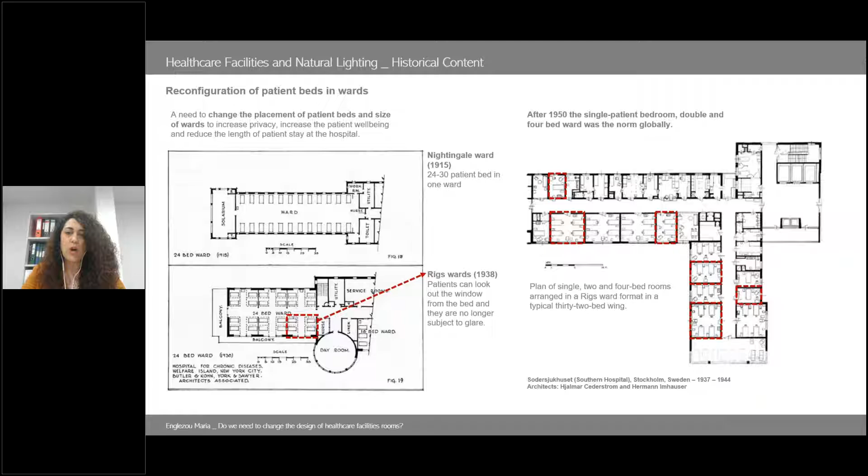While the Nightingale ward was widely used at the beginning of the 20th century, in the later years there was an increased need to change the placement of the patient beds and size of wards to increase privacy, increase the patient well-being, and reduce the length of patient stay at the hospital. Therefore, the Rigs ward was used, which included rooms with 4 beds, 2 beds, or even 1 bed in case of more privacy.

During the last 2 decades, there was an increased interest in the field of lighting, and specifically how daylight can affect the human physiology and psychology. 3 main pillars are identified. The first one includes the physiological aspect of light, which are basically made by photobiologists, chronobiologists, and neuroscientists. The second one studies the psychological aspect of lighting based on behavioral, cognitive, and environmental psychology. And the third pillar focuses on the spatial configuration, including architecture and lighting design.

The existing research investigated the human circadian rhythm and how light relates to changes in hormones, the sleep-wake cycle, the metabolic functions, and more. Other research fields study the cognitive performance of people in educational or office buildings, and basically the effects on productivity, alertness, and attention.

The main scope of the current research is building design and looking at the changes of daylight performance based on the location, orientation, room geometry, aperture sizes, glazing properties, or surface reflectances. To this day, visual comfort included the investigation of illuminance, luminance, or glare.

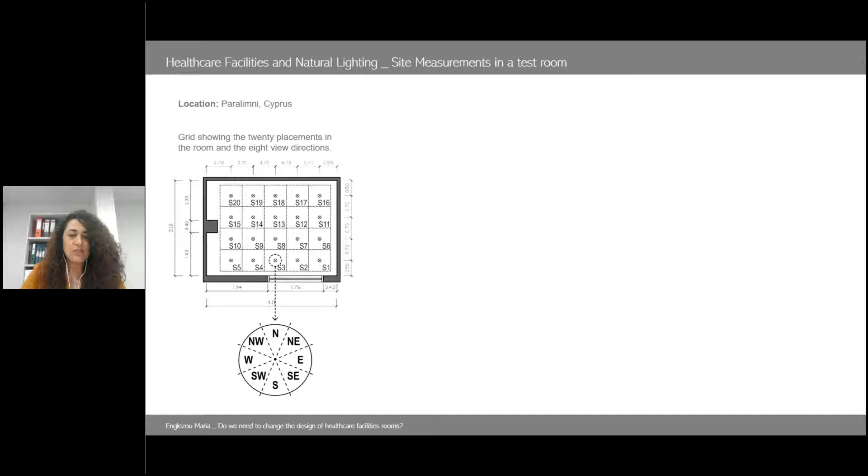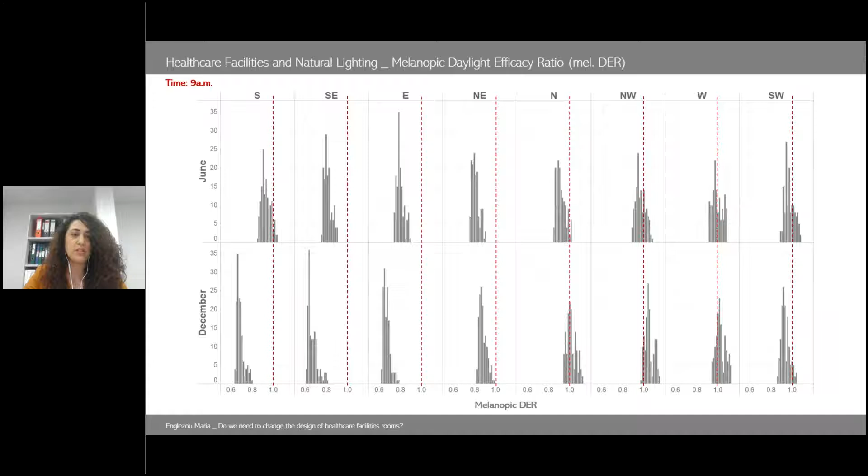In more detail, during June, the south, southeast and east orientations have melanopic DER from 0.8 up to 1.1, while the same orientations during December have melanopic DER from 0.6 up to 0.8.

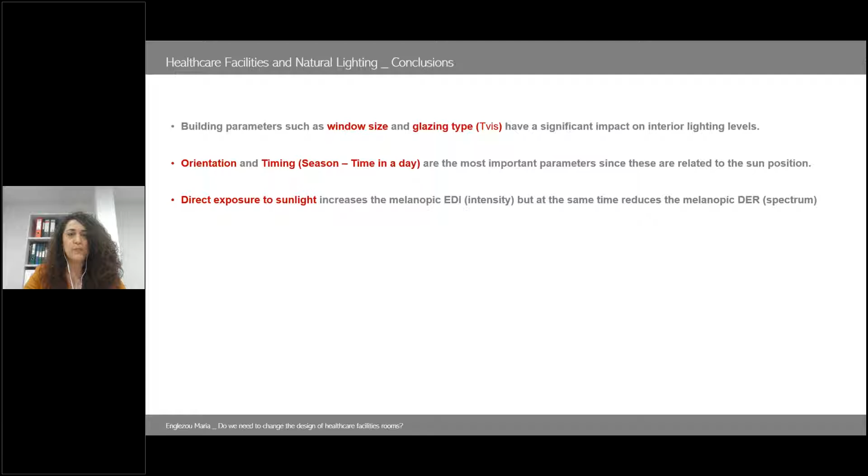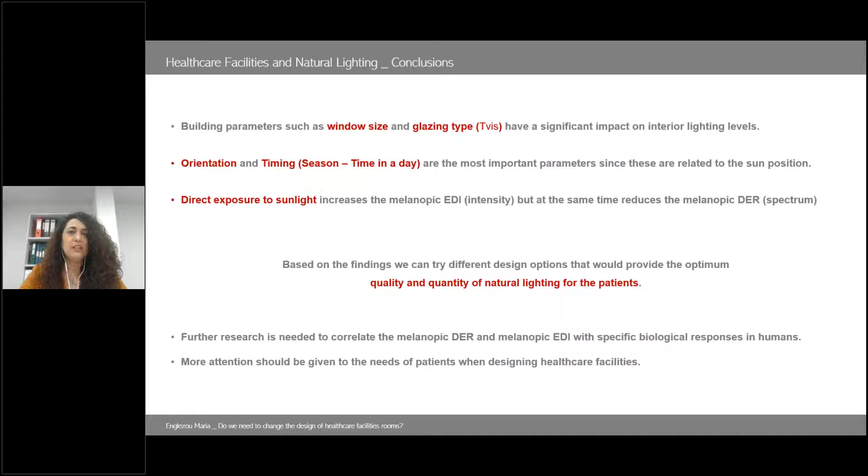So based on the findings, we can try different design options that would provide the optimum quality and quantity of natural lighting for the patients. Sorry. And moreover, further research is needed to correlate the melanopic DER and melanopic EDI with specific biological responses in humans. And finally, more attention should be given to the needs of patients when designing healthcare facilities.

And I would like to finish my presentation with a phrase by Richard Hobday, that in the right hands, sunlight can be a medicine. Thank you for listening.

Thank you very much indeed, Maria. That was fascinating and a great way to end as well. Superb. Thank you so much.

So on to our second presentation of the evening. We have María Teresa Aguilar Carrasco with the title of Lighting Optimization in 24-Hour Work Centers to Promote a Good Circadian Rhythm. Teresa is an architect and researcher at the Department of Architectural Construction at the Higher Technical School of Architecture of Seville. She's a member of the research group TEP130, and they are looking at architecture, heritage and sustainability, including acoustics, lighting, optics and energy. Teresa is a PhD student in architecture, developing research in the field of lighting and its relationship with the architectural design and human health. Over to you, Teresa.

Thank you. Hi. Cancer, depression, obesity, diabetes are only some of the diseases that shift workers may suffer. My name is Teresa, I'm an architect, and I'm trying to help solve this problem. But before getting into the subject, I would like to make a reflection about where we live.

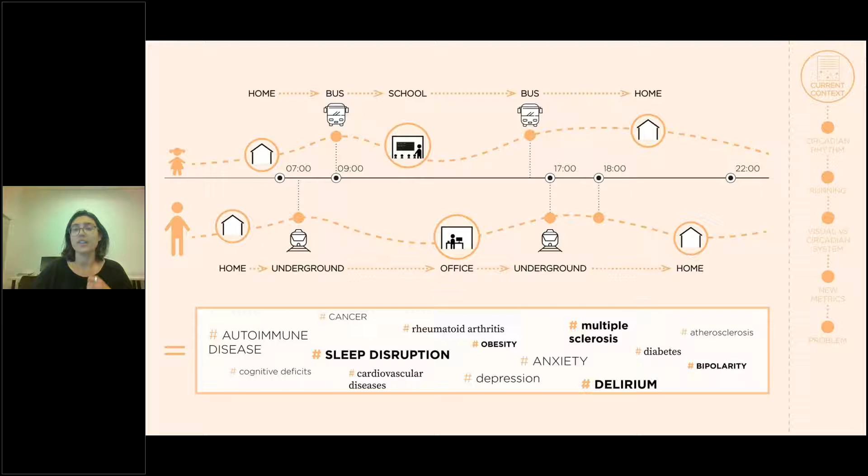So natural light plays a critical role in the circadian rhythm synchronization, but the problem appears when people start spending most of our time indoors, where natural light is insufficient and we have to turn on the electric lighting. So this puts our health at risk due to the circadian rhythm disruption. And several studies have demonstrated that this desynchronization is highly related to a large number of diseases such as sleep disorders, coronary heart disease, cancer, obesity, depression. And this became more and more important in continuous activity work centers where people are exposed to electric lighting not only during the day, but also during the night.

And although the problem appears with the arrival of electric lighting, we need it. So we have to turn it also into the solution. And the solution is called biodynamic lighting. The spectrum and intensity of natural light vary throughout the day and the different seasons of the year. And this is the working principle of biodynamic lighting. Biodynamic lighting allows both the luminous flux and the spectrum to be varied with the idea of being able to replicate the natural light at any time.

And here is where my research question arises. Is it possible to design a system to establish the optimal conditions of natural and electrical lighting in continuous activity workspaces in which it is intended to promote an adequate circadian rhythm? And this is translated into two main objectives. The first one consists of quantifying the influence of the different parameters of the architectural space on the circadian stimulus, that is room dimensions, windows, solar protection, furniture, reflectance. And the second one consists of making a proposal of biodynamic lighting configuration to promote a good circadian rhythm based on the architectural parameters and outdoor conditions, such as sky condition, location, or date.

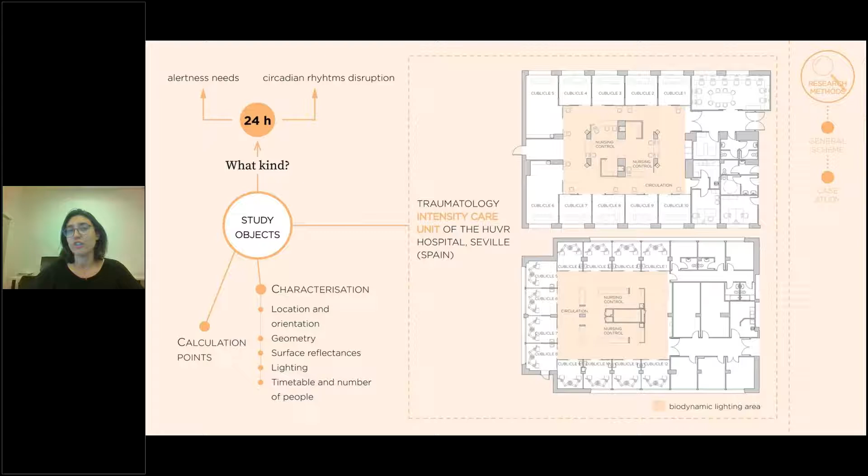And the first step is the characterization of these spaces, since it is essential for the creation of the virtual models. The virtual models are built using Grasshopper. Grasshopper is a parametric tool of Rhino software that has the advantage that it allows modifying any parameter of the architectural space at any time, the room dimensions, the window size, position. And to be sure that this virtual model behaves like reality, it must be adjusted. So real illuminance values are measured and compared with the simulation results under the same conditions. And the model is adjusted until the results coincide.

But this parametric tool, Grasshopper, has another advantage, and I think it's even more important, that is the possibility of using a wide variety of plugins for thermal or energy analysis, structural assessment, and what interested me, lighting simulations.

In this line, there are several plugins such as Diva and Climate Studio by Solemma or Honeybee by Ladybug Tools. And the main objective of using these tools is to calculate the luminance values, since from them and using the mathematical model described before, the circadian stimulus is calculated, as well as other metrics such as the melanopic photopic relation.

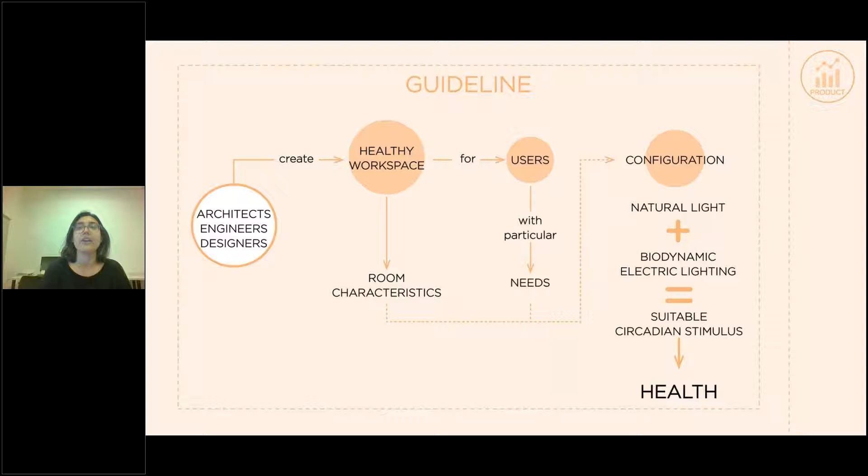And it is intended to be a guideline to help architects, engineers, and designers to optimize natural and electric lighting to create healthy workspaces, especially for users who have particular needs. And the guideline allows to configure natural and electric lighting according to the workspace's room characteristics to promote a good circadian rhythm.

And this methodology has already been proved, and first results have been obtained and published. And this guideline is being created. It has been applied in a 24-hour hospital laboratory, with a room configuration that shows great similarities to typical open plan workspaces. So the guideline can be easily used in many work centers. And the established parameters were the following.

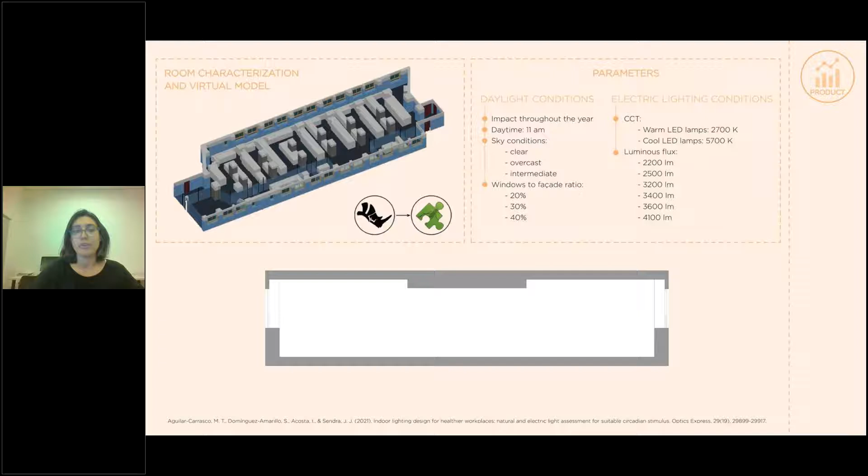About daylight conditions, first, the impact of daylight on circadian rhythms was assessed throughout all the year. And in the case of daytime, it must be highlighted that the objective of this first experiment was providing enough melatonin suppression at 11 a.m., since although melatonin suppression starts early in the morning, the lowest levels are achieved around this time.

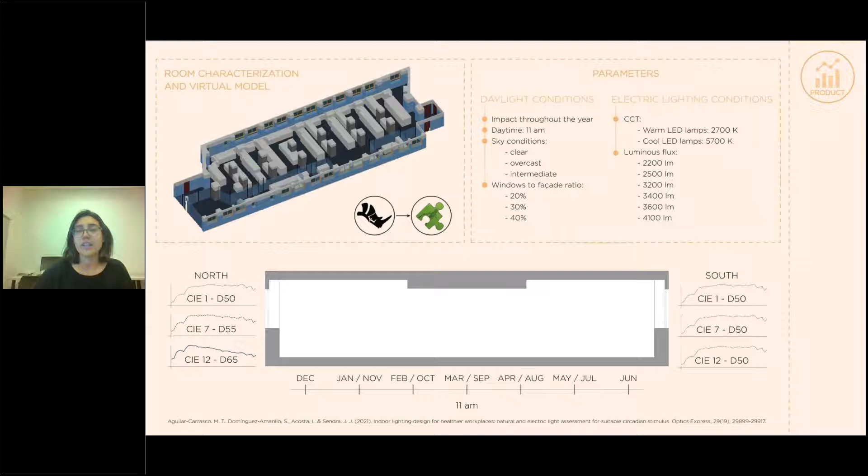As to sky conditions, 3 different skies were selected: clear, overcast, and intermediate skies. And the last parameter that affects natural light, that is window size. So 3 different room models were defined to evaluate the effect of window to facade ratio, 20, 30, and 40%.

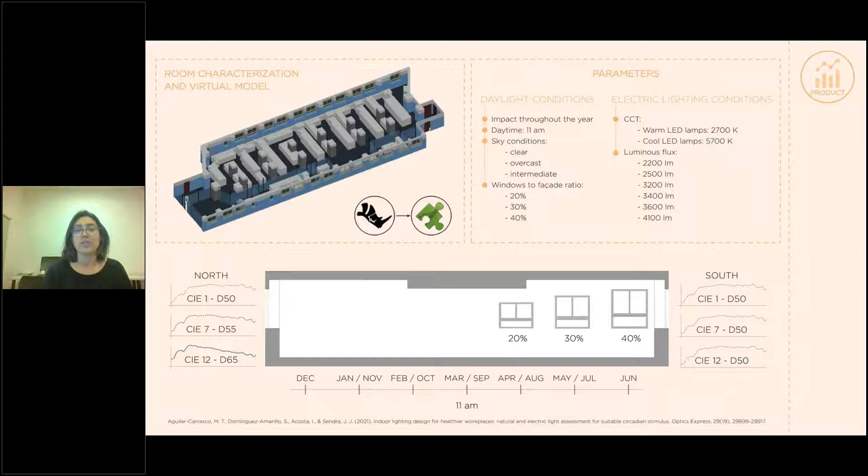As to electric lighting conditions, the correlated color temperature and the luminous flux are the parameters assessed. In this way, 2 scenarios were used, one with warm lamps and another with cool ones.

The virtual model was built and illuminance and circadian stimulus metrics were calculated with every combination of the parameters described before, and the results serve to determine guidelines to quantify the minimum luminous flux required both to guarantee a minimum illuminance value for visual tasks and to provide a suitable circadian stimulus value for occupants.

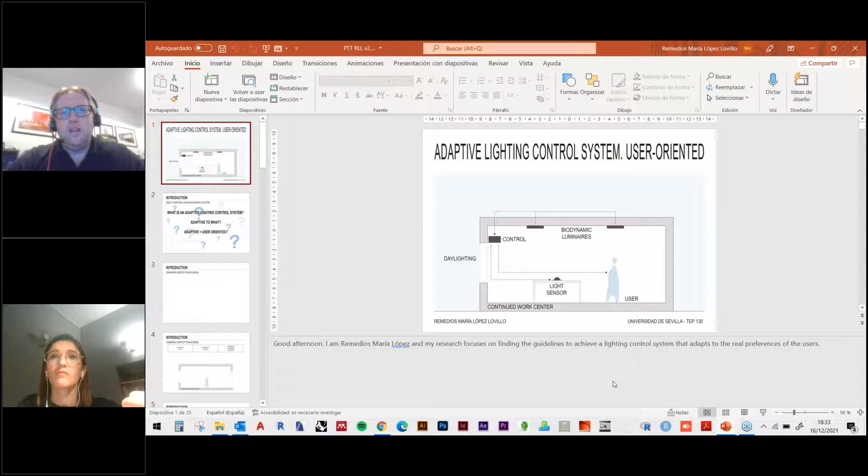This is Remedios María López Lovillo with a talk on adaptive lighting control system, and in particular the user-orientated effects. Remedios is an architect, having studied at the University of Seville in Spain. She is currently a PhD student in architecture and a researcher at the Department of Architectural Construction at the University of Seville. She's also a member of the research group TEP 130, looking at architecture, heritage and sustainability of the Andalusian scientific research. She develops research on the field of lighting control systems and its relationship with the architectural design and human interactions of health. Over to you, Remedios.

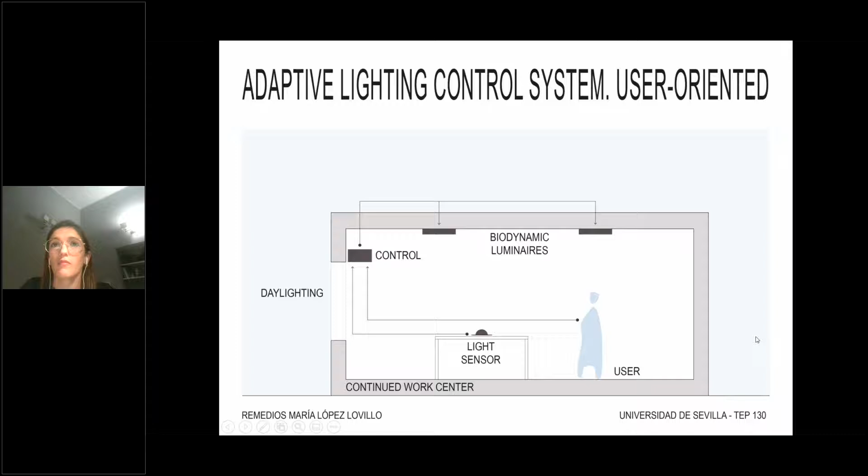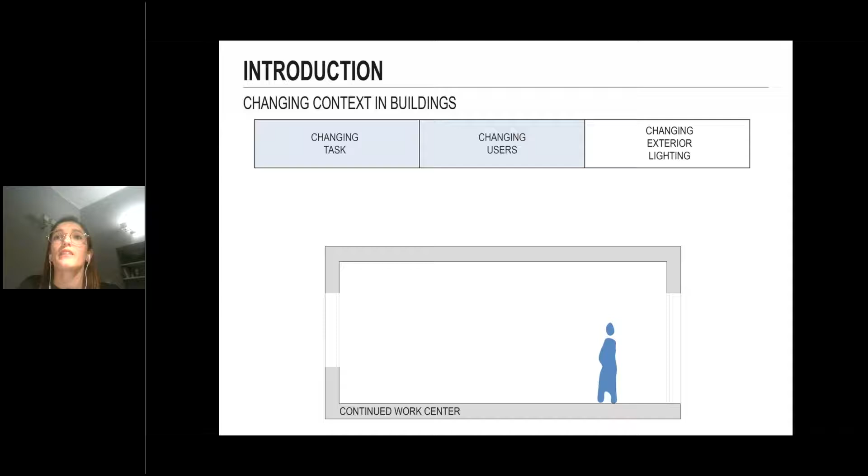I'm Remedios María López, and my research focuses on finding the guideline to achieve a lighting control system that adapts to the real preferences and needs of the users. The first question I asked myself when I started the research was, what is an adaptive lighting control system? Adaptive to what? Is it the same adaptive as user-oriented? The first thing I understood is that a lighting control system has to deal with multiple situations that occur due to the development of different tasks, the occupation by different people, and even the changing exterior conditions.

However, traditional lighting control systems have mainly been concerned with maximizing energy saving, achieving lighting values according to standards, and guaranteeing comfortable indoor thermal conditions. But analyzing the real needs of the user has not been a very widespread objective. So for that purpose, it will be necessary to analyze what are the real user needs, what are the lighting preferences of this user, and even obtain a lighting environment that ensures their health. So these seem to be the keys towards an adaptive lighting control system user-oriented.

So at this point, the following research question comes up. Is it possible to get a lighting control system that considers the preferences of the users, adapts to their needs, and ensures their health? To answer this question, the progress is divided into two sub-questions. The first one, how can we configure a user-oriented lighting control system? And the second one, how are the user preferences, needs, behaviors being incorporated in this control? So the aim of this work is to establish the guideline to achieve a lighting control system user-oriented.

So the first approach to achieve this objective is to analyze what are the conditioning elements of this system. First, it is important to consider what are the lights inside the space we analyze. We must be aware of the importance of prioritizing the use of daylighting because it is beneficial for the health and the performance of the users. However, we cannot always depend on daylighting. So the most common system combines the use of both daylighting and electrical lighting.

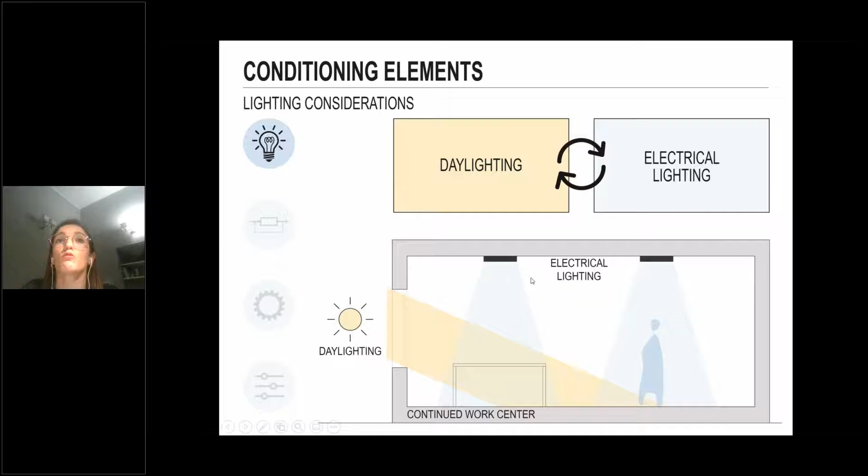So considering the two lighting sources mentioned above, the next step is to determine the type of strategy. Traditionally, two main types of strategy have been established: feed-forward or open loop, and feedback or closed loop. In the former, only daylighting is considered, while in the latter, the feedback component allows analyzing the level of both electrical and natural lighting and regulating the system according to the established values.

In this system, multiple elements participate. For example, sensors are very important elements because they give us information about the lighting level in several points of the space, but they also give information about presence, or can even identify the occupants. Actuators are related to the output element of the system, and these not only turn the luminaires on/off, but also allow regulating the brightness or the intensity, and even the color temperature. Controllers are an essential element too, because they define the control mode. For example, it could be on/off, proportional to the measured level, or proportional to the measured error.

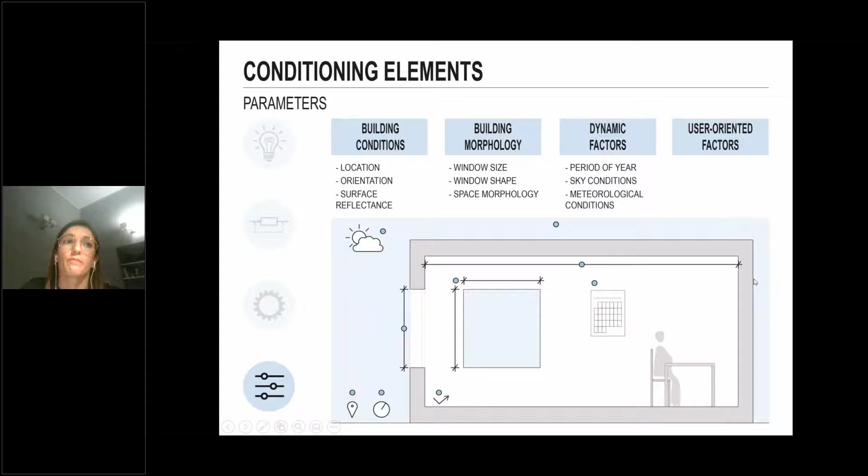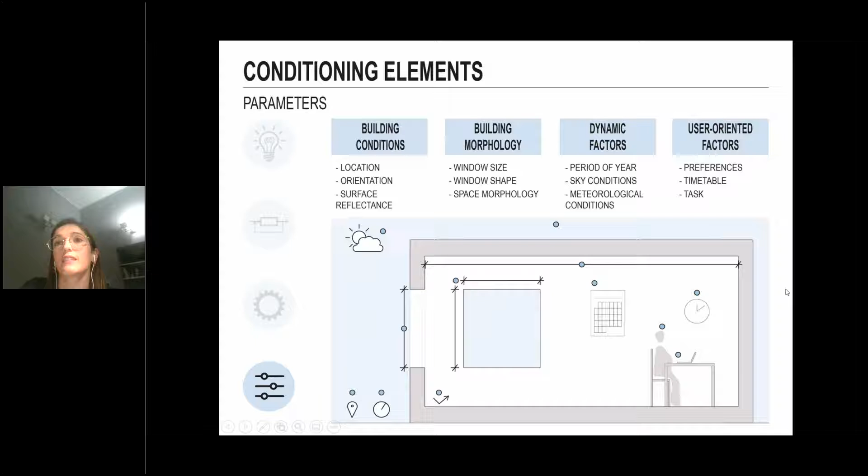Another important consideration is to know what are the parameters that define the space, the surroundings, and even the user. For example, we have building condition parameters, such as the location, the orientation, or interior ones like the reflectance of the surfaces. Others are directly related to the morphology of the space, such as the window shape and size, and even the dimensions of the space. There are dynamic factors too, such as the period of the year, the sky condition, or the meteorological condition. And in relation to the user, we must consider their lighting preferences, their timetable in this space, and even the type of task they perform.

So we already have the key elements to configure a lighting control system. But how can we include the user in this system? Well, first we must know what conditions the user in relation to their preferences and needs. Visual preferences must be considered, but also thermal, because they could condition the former.

Moreover, physiological aspects such as the regulation of the circadian rhythm and psychological aspects must be considered. And to know how these factors affect the user and their behavior, we can analyze their interaction with the system, for example, through observation. However, this is not always possible and/or effective.

So another method is through surveys. In this type, we can use much more structured and direct questions to know more specific aspects. Otherwise, some research has found that people have more important things to do than worrying about configuring the system to their preferences. So it could be better to anticipate the actions of the occupant.

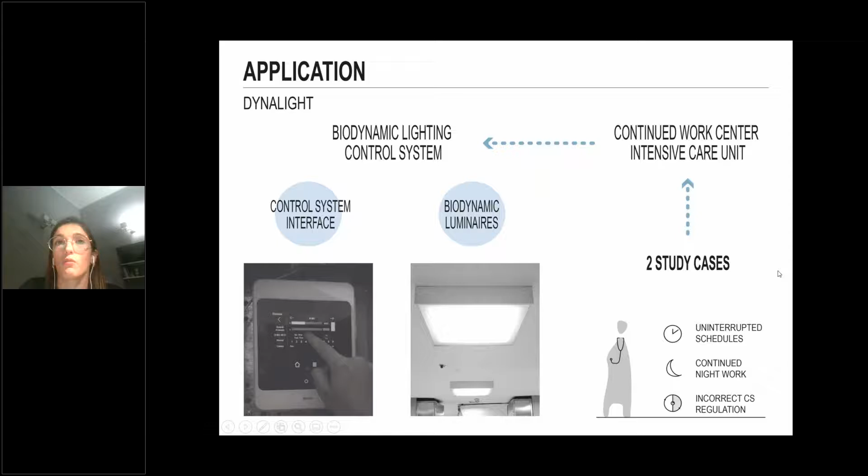So in the first project, called Dynalight, a biodynamic lighting control system has been installed with biodynamic luminaires, controlled by a SPENA module. So in this unit, the system allows regulating both flux and color temperature to favor the circadian rhythm of the occupant. So in this project, we have configured different scenes and we started the experimentation.

On the one hand, we surveyed the users, asking questions related to color rendering, thermal comfort conditions, and other parameters. And this is complemented with biological samples that have been collected to control the melatonin secretion and thus know the regulation of the circadian rhythm. And also on these test days, environmental measurements have been taken related to the horizontal illuminance, the vertical illuminance in 4 directions, and humidity and temperature.

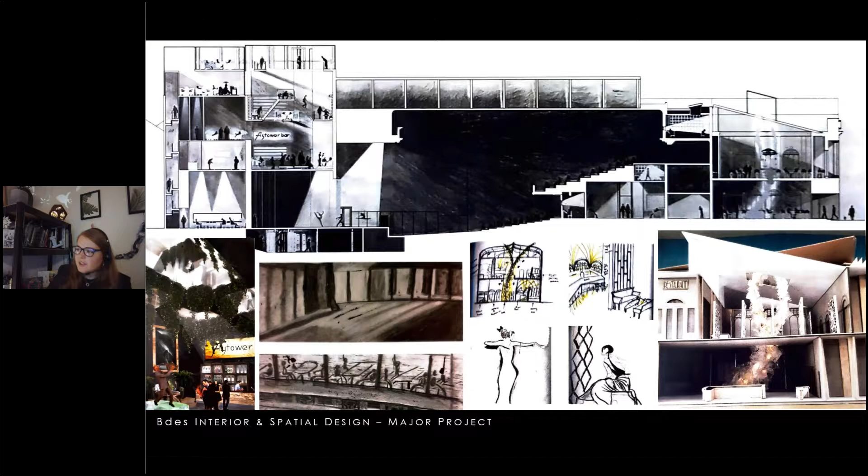My interior and spatial design major project looked at the restoration of an old Art Deco theatre. During the project, I became very interested in designing an artistic lighting centerpiece at the entrance of the building to draw people in with the light. At the end of my undergraduate degree, I continued my education with a lighting design master's at Edinburgh Napier University.

My first introduction to co-design projects was during my master's degree. My design tutors Malcolm and Ewan were working on the 12 Closes project in Edinburgh, and I was able to assist. The project aimed to reimagine Edinburgh's Old Town and worked with the residents of the closes. Exploration started with allowing the residents to play with torches and other luminaires to explore and propose new ideas and ways of lighting the closes in a fun and functional way.

At the start of my master's degree, I began looking into projects that involved co-design with children. There are many examples of co-design with children and even with adults within other design specialisms. However, at the time of the project, I could not find any documented projects about co-design with children within a lighting project.

My lighting design major project: Children's Utopian Visions of the City, co-designing lighting master plans through play and exploration. The project established processes and methods involved in children's co-design. It was based on a case study working with children to redesign urban third spaces in the west of Edinburgh under the topic of utopia.

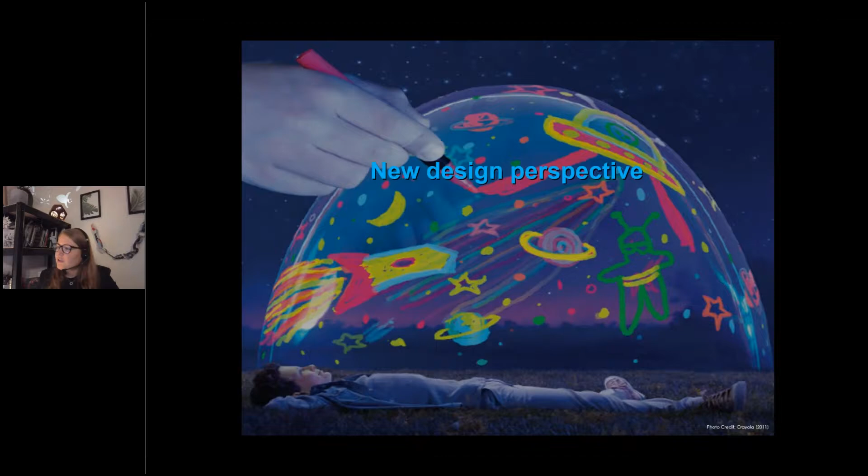The future of co-design with children, primarily within light, is uncertain, as there are only a number of lighting projects working with children at the moment. The project highlights the importance of children in lighting design and their ability to produce unique ideas. Co-designing with children can bring a new, fun, and different perspective to a project, one that adults may not be able to imagine.

It also introduced the concept of lighting to children, which will allow them, as the adults of tomorrow, to know what lighting design is and understand the role of a lighting designer. To keep the lighting industry growing, we need to inspire children at this young age and start to educate them about lighting earlier.

So during the summer months of my master's degree, I undertook a summer work placement at Buro Happold in Edinburgh. This is where I was introduced to DIALux for the first time. I'm quite interested in different modeling programs, so enjoyed learning how to use the software over my time there. I also went on site for the first time, where I helped with the commissioning of this large chandelier in McEwan Hall.

After the completion of my degree, I began working at WSP in London as a graduate lighting designer, joining a small team with Sasha and Alexandra. As I only had 2 months' experience to my name at the time, I was a bit unsure as to what to expect. The job also involved me moving from Edinburgh to London, which was quite a big step for me after living in Edinburgh all my life. Every day, the job involves learning new and fascinating things about lighting.

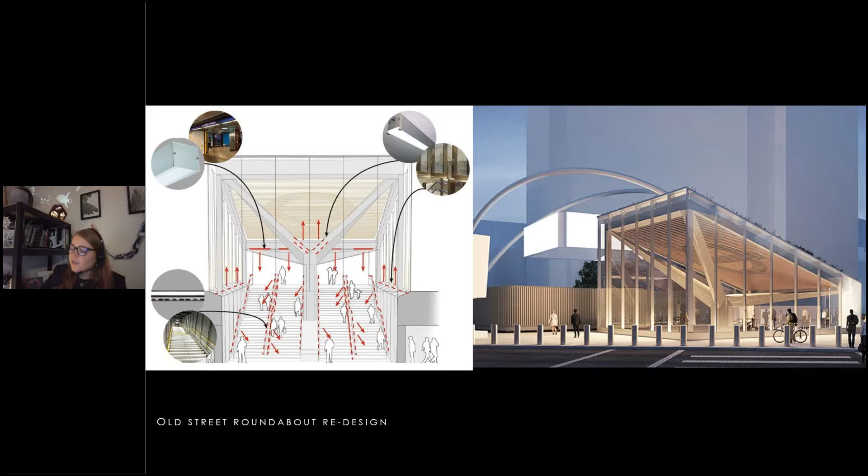During my time at WSP, I have had the chance to work on a range of different projects. I have particularly enjoyed working on urban realm, lighting master plan, and heritage projects. As WSP is a multidisciplinary company, I've had the opportunity to work with and learn from the other disciplines within the company on larger scale projects.

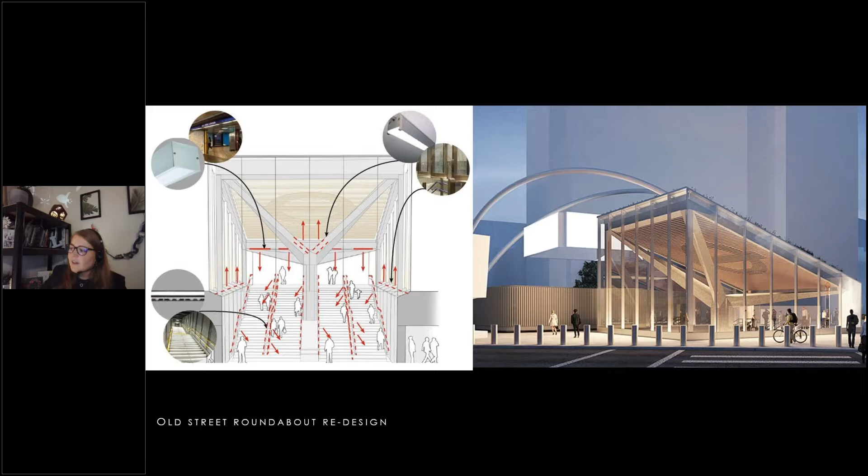The project shown on the screen here is Old Street Roundabout, that I've had the opportunity to work on from the beginning to the construction stage where we are currently. From this project, I have learned a lot, including lighting controls, electrical circuits, and TfL standards.

Since joining the company, Sasha continued to encourage me to enter the SLL Young Lighting Designer of the Year competition, and I'm so happy he did, as I've learned so much from the competition. The competition provided me with an opportunity to take a second look at the project, which helped me understand better what I had achieved during my lighting masters and rationalise the project.

The early stage of the competition involved me creating a short film about my project, which I think took quite a few takes to get right. The following stage involved several late nights trying to reduce my 16,000 word dissertation to I think about a quarter of that. And finally, the preparation for the final presentation.

For the presentation, I did quite a few dry runs with the lighting team where they provided their thoughts and feedback. The competition really helped me develop my presentational skills and allowed me to continue my research into children and lighting and to raise awareness of the issue to the wider lighting community. So I would highly recommend the competition to anyone thinking of applying.

I have been a member of the SLL since I started at WSP. Last year, I became elected member of the SLL Council and also successfully achieved my associate membership and plan to continue to the next level in the coming year. SLL have a number of interesting events to go to and learn more about light.

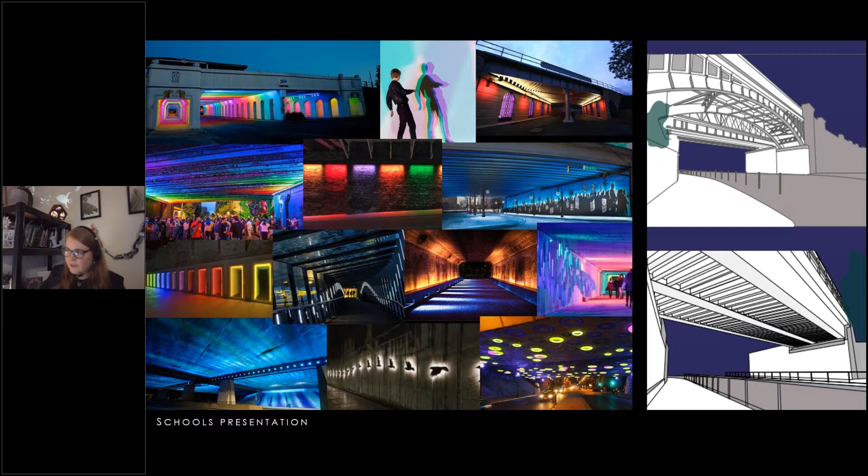We then commenced with a Friday morning session with each of the schools through video call. We began the workshop with a little introduction about what lighting design is and our role as lighting designers. We then introduced the project and provided them blank templates to create their designs on, which could be based on local landmarks, their passions, or simply their own taste.

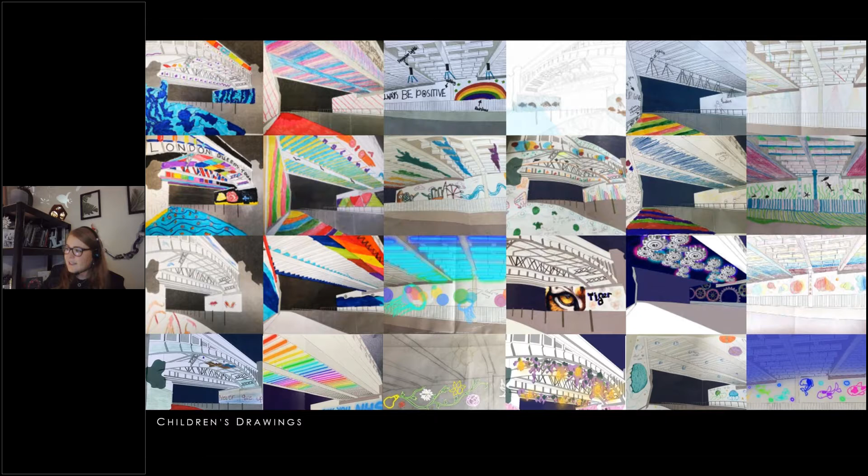On the following Monday, we caught up with the children who presented us their design ideas. You can see from these drawings how colour, silhouette, and shadow play have inspired the children, along with recurring themes such as underwater, rainbows, nature, and landmarks. Our next step was to interpret the children's drawings and create workable solutions under the themes of heritage, creative, and culture.

STEM work in schools is really important, especially when related to lighting. By working with children on design projects, this brings a new, fun, and different perspective to the design and also provided us with first-hand experience from the bridge users. Through STEM-based workshops, we are raising awareness of the field of lighting design to the children and talking about what lighting design is and what a lighting designer does. By getting the children involved in the design of the bridges, this is creating a relationship between the children and the bridges.

After completing the project with Newton Prep, they then got in contact to ask for our help with another project. WSP Architectural Lighting have been working with the children of Newton Prep at Nine Elms to create an illuminated Christmas window. Children from years 3, 4, and 5 have all contributed artworks to a window where peace on earth is celebrated, with the traditional white doves and fallen snowflakes fluttering in a restful white scene with a twist. UV lamps and fluttering fans bring the scene to a glowing, moving life for the passers and onlookers in Lockton Road. So if you're in the area, I'd recommend taking a look.